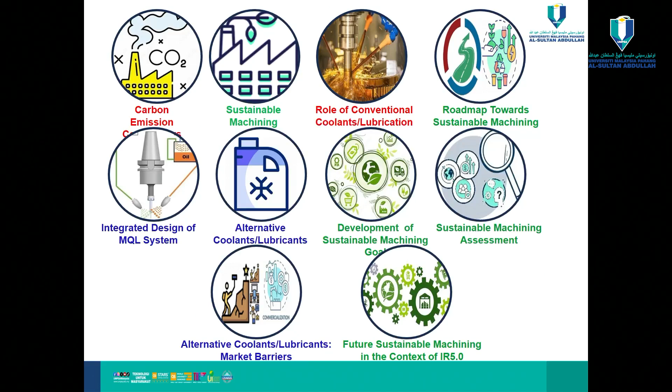So this is the 10 points I try to discuss today. And next, all right, we can see here

carbon emission distributed from different industries. Energy industry contributes 1/4 of the carbon emission, and manufacturing industry is also part of the energy industry, but we can separate it because today I talk about the manufacturing industry, which contributes 1/5 of the carbon emission. Transport industry 14%, agriculture and forest 24%, building 6%, and other industries 10%.

So, what is the problem with carbon emission? It increases the greenhouse effect. Here you can see the greenhouse effect mainly contributes to carbon emission, and this carbon emission comes from the manufacturing industry, 1/5%.

So how do we control this carbon emission in manufacturing industry? There are 3 problems here. Number 1, when the greenhouse effect occurs, the earth's temperature rises. If the earth's temperature increases, there are different causes, for example, rainfall patterns are globally changed - sometimes without season they have heavy rain, and sometimes flash flooding.

Another effect of earth temperature rise: sometimes in the forest they have wildfires. And the ocean absorbs excessive heat and carbon dioxide, leading to sea temperature rise, which threatens the marine system. That's why sometimes you see fish dying in the sea due to acidity - they develop acidity in the sea water.

And also we have weather events. Sometimes we can see a higher possibility of heat waves, sometimes hurricanes or storms, due to global warming and climate change.

So how can we address this problem? First of all, reduce carbon emission, number 1. Number 2, transition to renewable energy sources. Third, we can see sustainable practice in all activities. That's why today I'm talking about sustainable machining, because this is our main target.

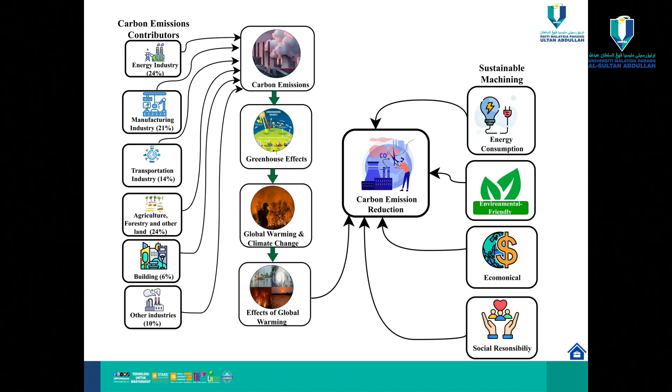Sustainable machining, when talking about sustainable machining, we have 4 components, the pillars of sustainable machining. In terms of technological aspect, product should be high quality - this is number 1. Number 2 is economically viable, that means economically profitable, the cost should be cost effective, less price to produce the product.

Third is the main component today, how to make energy efficient or the environmental impact. Because when we're talking about Industry 5.0, one of the pillars is sustainability, so we have to consider minimum energy consumption using eco-friendly machining systems. The fourth one, not considered in Industry 4.0, is the society responsibility, or the human less risk or less hazard. So these are the 4 components.

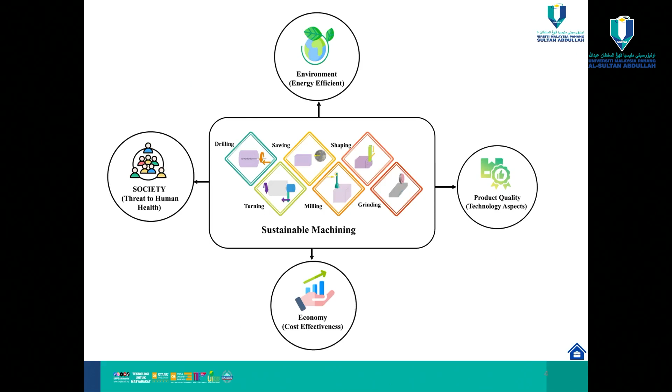Now next slide, we can go to product quality. What component do we need to consider during sustainable machining? These are the things we need to consider when talking about product quality. Product surface should be very smooth, that means good surface finish. So how can we define the surface finish?

Number 1, tool life should be higher. When using the machining system, they have the tools, so this tool life should be extended tool life. And for productivity, we can consider high material removal rate. So these 3 components we can consider here.

And for the product, we can see the cutting temperature, cutting force, and cutting power. This should be minimum, so reduce energy consumption. So when considering sustainable machining, these are the product quality related components we need to manipulate or control.

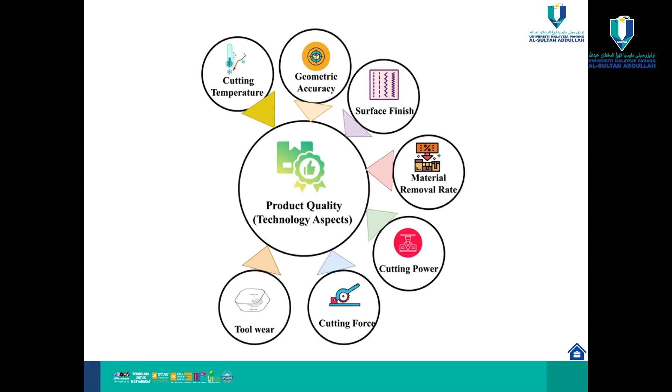Next slide. Cost effectiveness - when talking about cost, we have to find alternative tools, because tools are one of the components, so tool cost we need to minimize, and lubricant and coolant cost. This is the main component of product cost - coolant cost, cutting tools, and electricity is the energy, so how we can make an energy efficient system for our industry. This is and material cost.

And the other cost we can call disposal management - disposal, either storage or management or maintenance. So these things we need to consider.

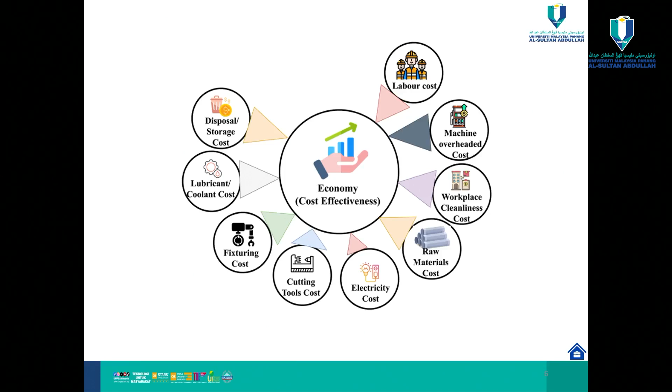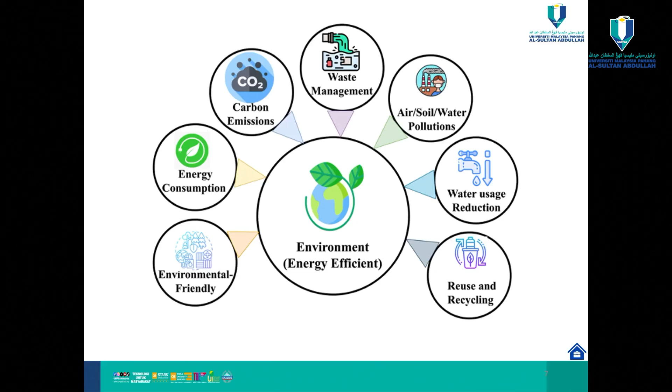This is the environment. The environment has pollution either air, water, or soil. So how to minimize this contamination? Because we're using cutting fluid, which has a lot of harmful elements, so how to reduce this contamination in the environment, and also energy consumption and eco-friendliness.

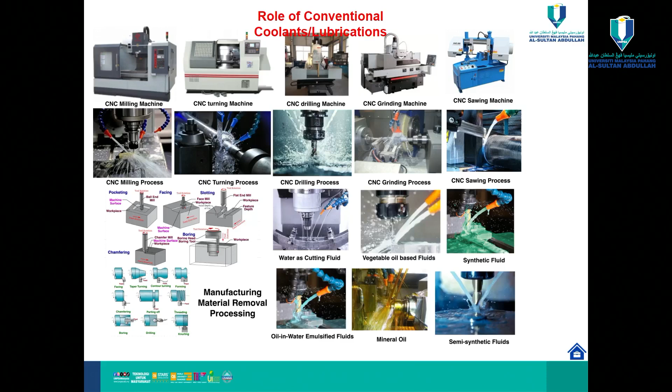What is the positive aspect? When you consider the cutting fluid, we need to consider 4 elements. Number 1, this should be more lubricant. So when you consider cutting fluid, it is more lubricant - what is the lubrication? This contributes to less friction, less wear.

So these are two things: heat reduction, and also coolant - when using cutting fluid, temperature should be reduced, so this is the second item. Third item is chip transport, taking chips from the cutting zone. And the fourth item we can consider is rust prevention or corrosion resistance. So these are the 4 components you consider.

Currently we can use water as a coolant. Water is a good conductor, but it has less lubrication properties. So this is not ideal, and it causes corrosion. So this is not ideal for current sustainable machining.

Second one, normally we use mineral oil. Mineral oil lubricant is good, heat transport is also good. However, the problem is this is also corrosive. Sometimes they corrode because of some additives in the mineral oil. So that is not suitable for sustainable machining.

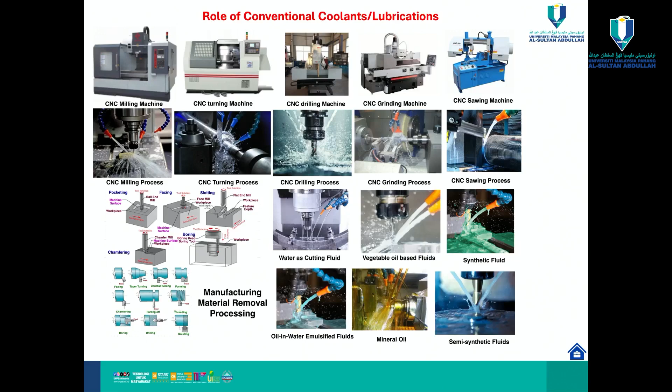So when you select the cutting fluid, first we want to see what type of method it is - either milling or turning. Type of machining is number one, because different processes need different cutting fluid selections. Second is what type of material you want to cut - soft material or hard material. So it depends on a lot of factors.

So normally we use water, either mineral oil, synthetic or semi-synthetic, or water-soluble cutting fluid. So they have some problems in the environment and human health. So what is the environmental adverse effect?

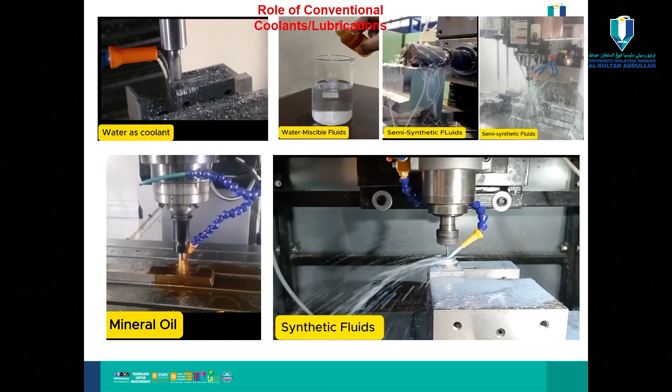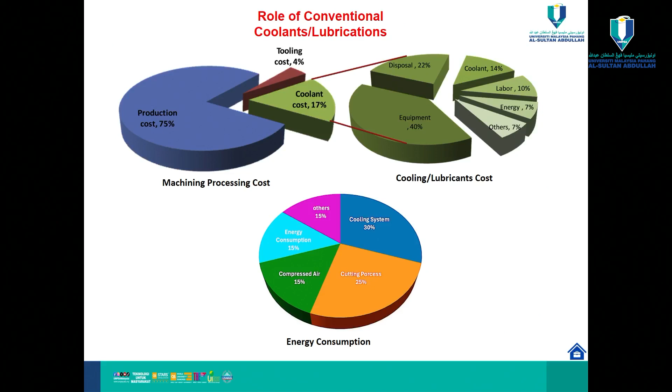So why do we want to change our mind from conventional machining to sustainable machining? Number one, you can see coolant cost is 17% of the total cost of the product. So this is very high. That's why we want to find alternative solutions to reduce coolant cost and other energy consumption.

You can see here, conventional coolant - I already mentioned they have 4 advantages: good lubricant, good chip removal capability, also corrosion resistance, and heat dissipation. So these 4 criteria are good for conventional machining.

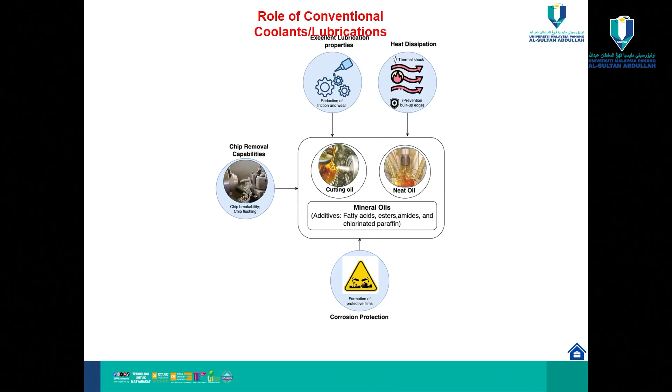What is the adverse condition? This contributes to Industry 5.0, because Industry 5.0 should be environmentally safe and also reduce human health risk. You can see here, environmental impact.

They have water pollution when using conventional fluid. A lot of fluid passes through the industry, then goes to the river, and the river gets polluted. Sometimes the soil is also polluted. During machining, there's mist or vaporization - this also pollutes the environment or air. Also you can see the floor becomes very messy, a slippery condition. Sometimes accidents happen. That's why you need to replace conventional fluid with sustainable cutting fluid.

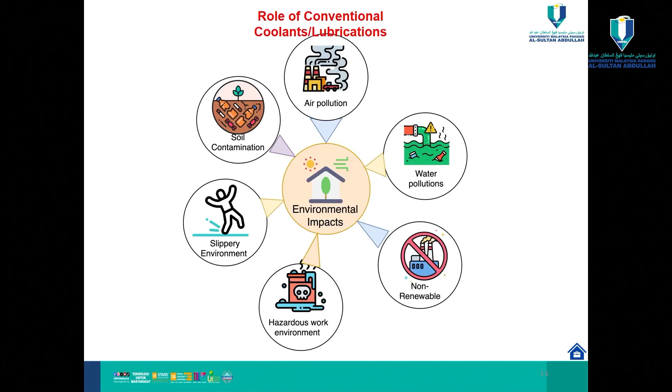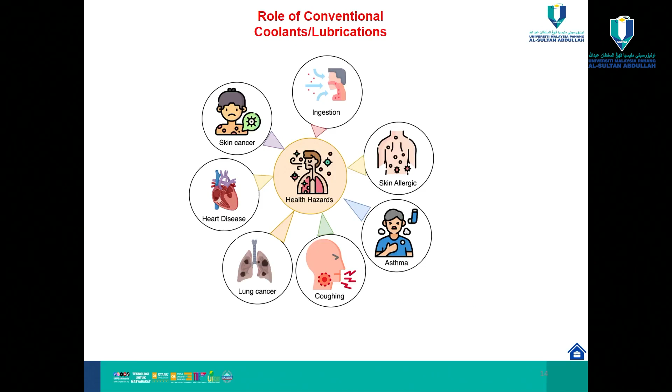So you can see the human factor - this is the main cause in Industry 5.0 of why conventional fluid converts to sustainable machining fluid. Because during machining there's mist or vapor, which we can take in through the mouth or nose, and a lot of problems occur. That's why with our carbon emission standards, we need to minimize this contamination or risk.

So converting conventional fluid to more sustainable fluid - that means, as I already mentioned, either synthetic or semi-synthetic or emulsified oil. So they have all 4 components, and we can also improve the microbial resistance.

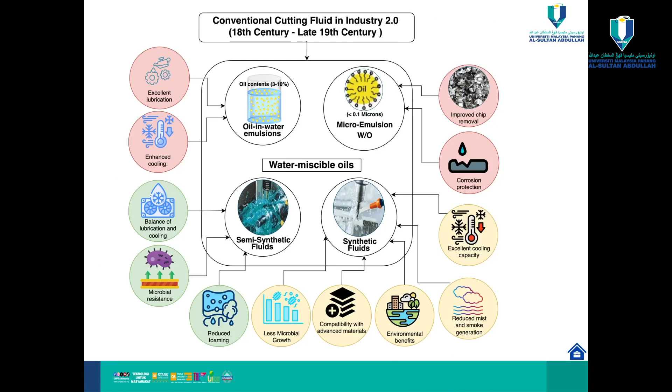So now comes the final choice for the conventional fluid to the sustainable fluid. This is a biodegradable oil or the vegetable oil using as a cutting fluid. This is less toxic and also has a low carbon footprint, so it's called eco-friendly. However, they have the problem of low thermal conductivity. This is one of the main components for the cutting fluid.

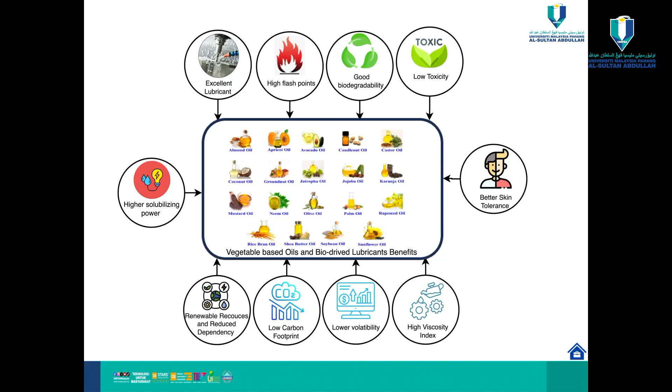We can see here the history of why it becomes sustainable machining. First, from the very beginning, Industry 1.0, they start from water and mineral oil as a cutting fluid. Then comes synthetic, semi-synthetics, and finally goes to the biodegradable, or we can say the vegetable oil, as a cutting fluid. And then, to reduce this adverse situation, we can come out with a new cutting technology, which we call dry machining.

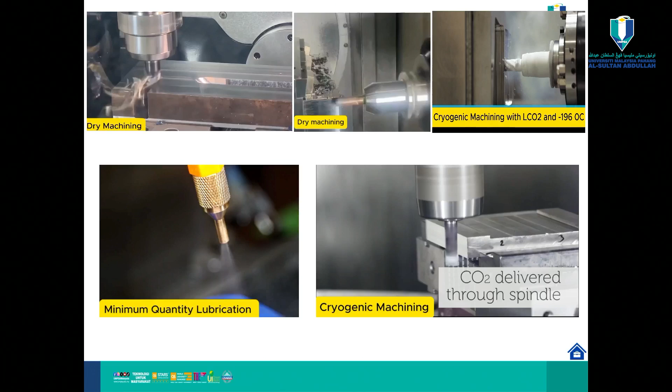Okay, we can see here dry machining. In dry machining, they are not using the cutting fluid, so 17% of the cost we can cut here. So number one is dry cutting, but they have a lot of advantages. Number one, no cutting fluid, no recycling system for the disposal, so you can cut the disposal system. Number three, this is environmental friendly, so the working place is neat and clean.

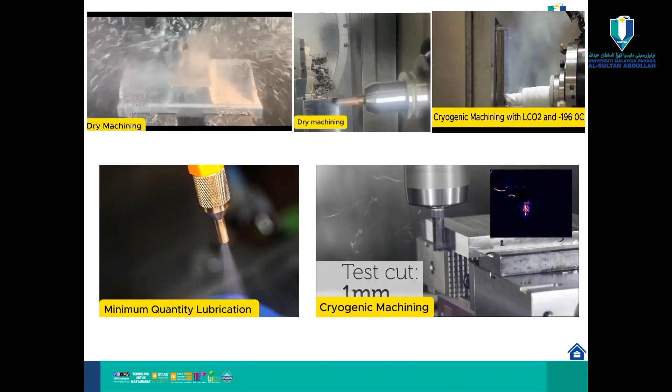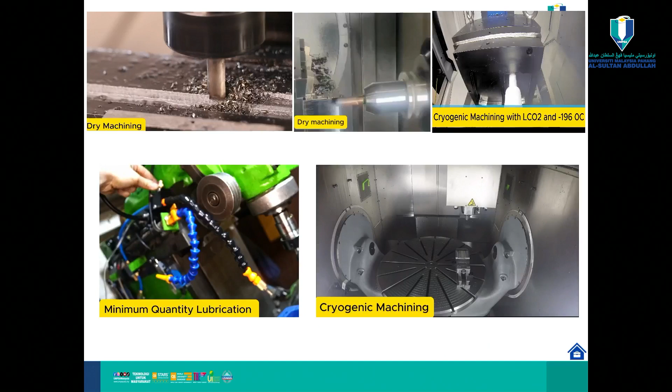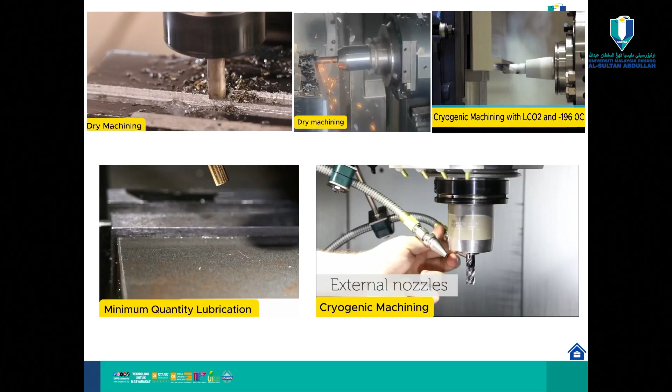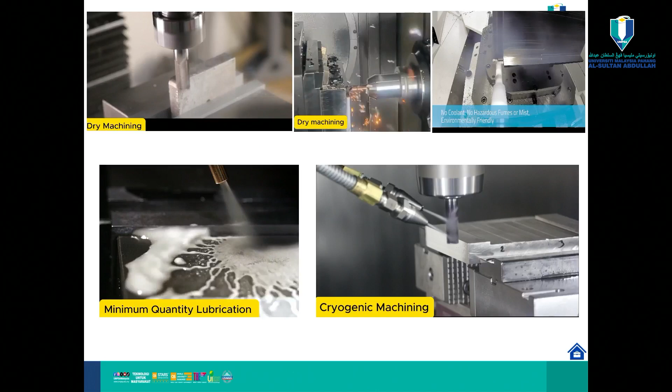However, they have problems. Number one problem is the chip disposal surrounding the working place. Number two, when you dry machine, they create high heat and also high friction, and sometimes you can see firing during the process. So dry machining has fire issues, and also reduces productivity and product quality. So although this is sustainable process, it is not good for the whole material, so this is not the final solution.

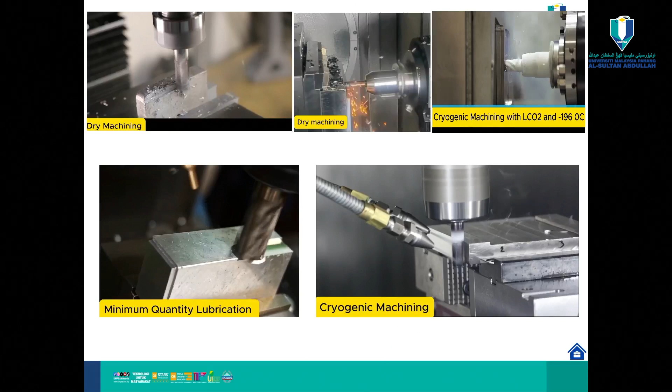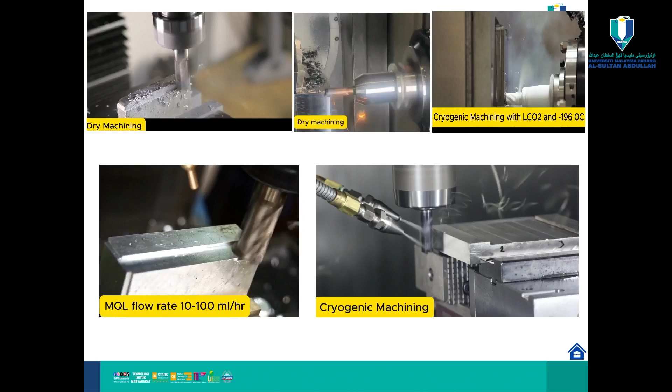Then we can come out with cryogenic machining. But cryogenic machining, one of the main drawbacks is the initial cost is very high. Product quality is good, and temperature is also controlled. So this is another option, but the main problem is very high initial cost.

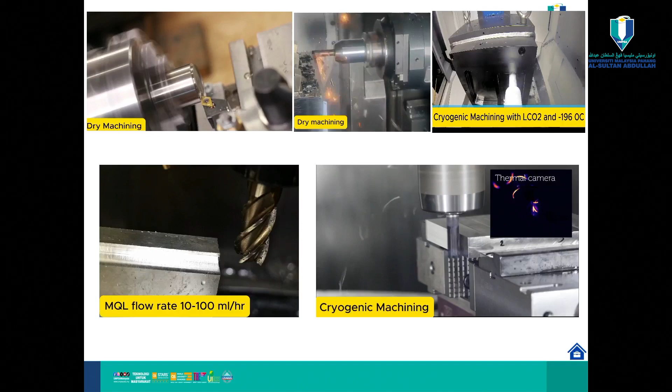So then we can come out with the MQL system, minimum quantity lubrication. This is our final solution, becomes a sustainable machining.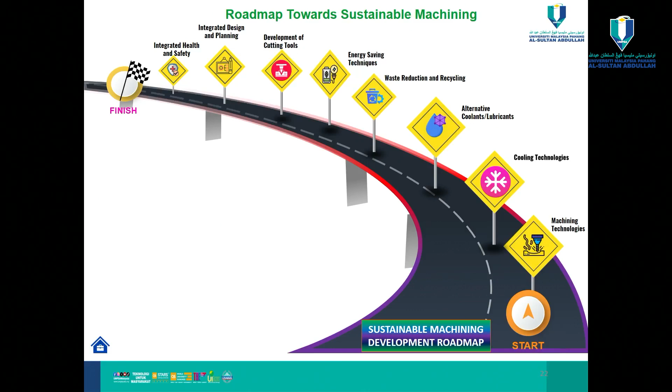So what is the roadmap to become sustainable machining? First, we need to consider the machining technology, then the cooling system, what type of cooling system we can consider, alternative coolant, and waste management system. And finally, you can see the integrated system. So today I try to concentrate more on the coolant technology and the alternative coolant becoming sustainable machining.

All right, so this is the sustainable machining coolant system. We already mentioned they have a lot of choice. Which choice you can pick is based on your available facilities. For example, if you're using cryogenic, the initial cost is very high. But when you consider minimum quantity lubrication, this is a small investment, initial cost is very less, and this is good, quality is also good. You can see here MQL, nanofluid MQL, hybrid nanofluid MQL, hybrid nanocoolant MQL, and other types. So we only consider here 3 types.

MQL with the nano coolant.

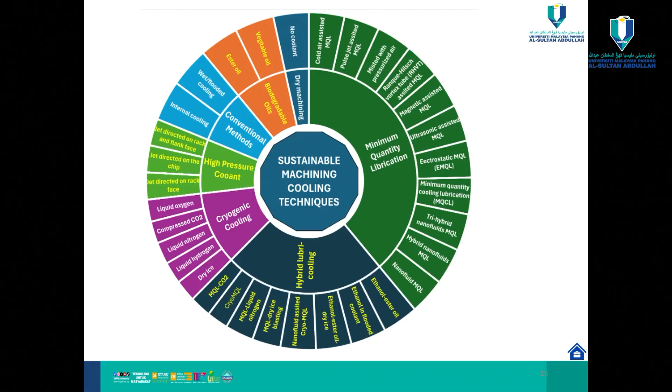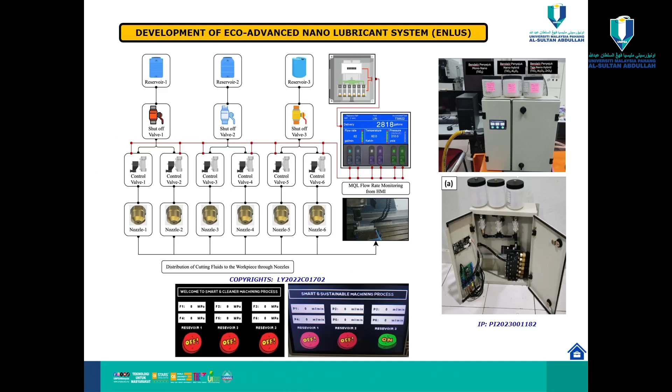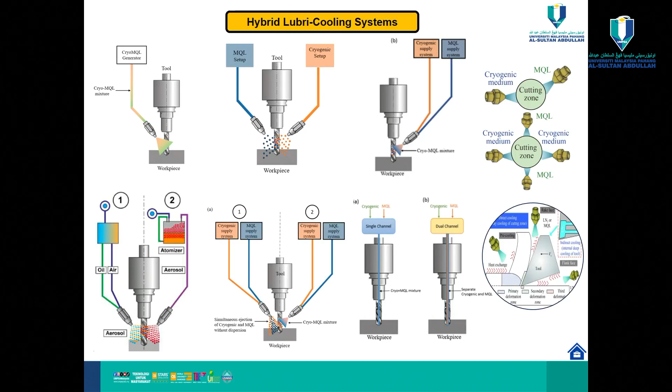This is for future research: we can combine cooling and lubrication systems. If permitted, there are alternative solutions to consider, either internal cooling or external cooling, combining two different methods, such as cryogenic MQL or MQL with other coolants like liquid carbon dioxide, liquid hydrogen, or liquid nitrogen. So you can use different techniques here.

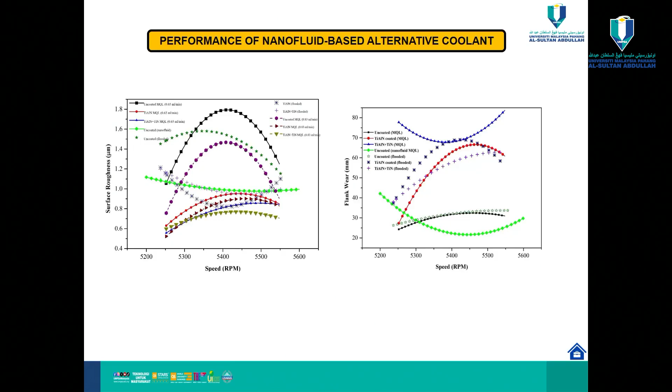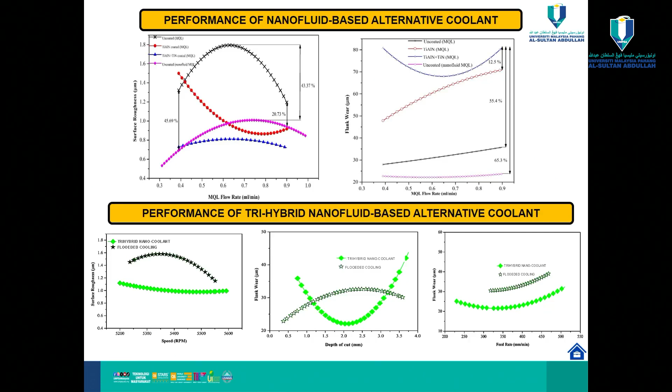This is the tri-hybrid nanofluid. All three show reduced surface roughness, meaning good surface finish and reduced tool wear. Both flank wear and tool wear are improved. This is also an encouraging result here.

This is a very good outcome for industry - this is the tool wear chart. We can see three zones, mainly two zones: one is less wear, the safe zone. Based on industry requirements, people can select accordingly. Same color means same tool wear, so we can manipulate speed and feed rate for our targeted productivity, and increase productivity based on this outcome.

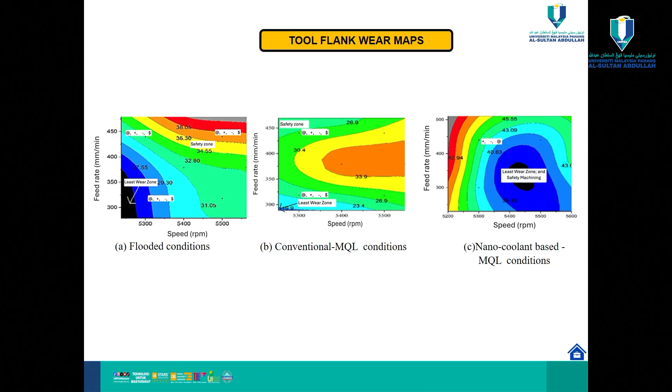We can compare three different methods: MQL, flooded, and the conventional method which is flooded. The next one is MQL with conventional fluid, meaning we use biodegradable oil. The last one is eco-friendly nano coolant, our alternative coolant here. You can see the surface finish is very nice compared to the other two methods.

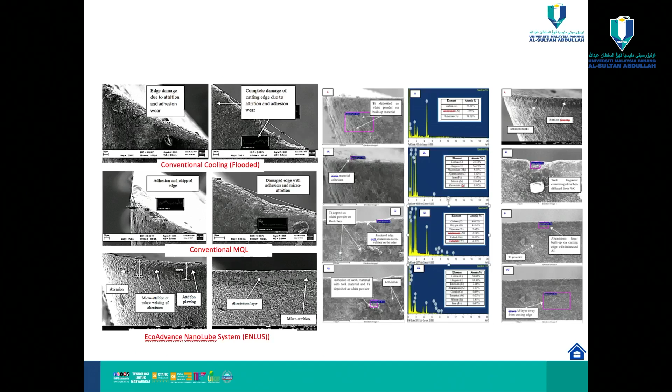So how can we come up with an alternative coolant using nano fluid or nanoparticles? First, we select the nanoparticle type, either mono, hybrid, or tri-hybrid, based on different combinations such as metal, metal oxide, ceramic carbide, or ceramic.

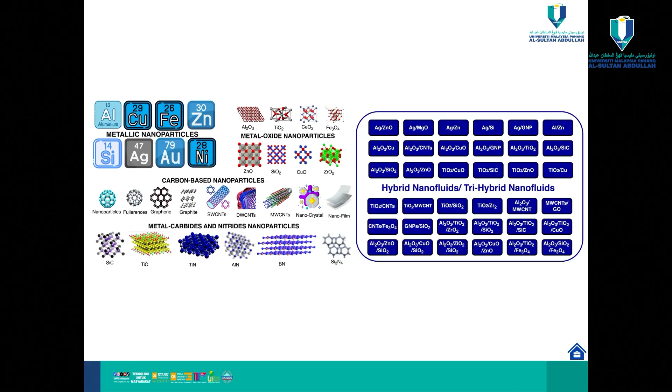This is a summary example - we can combine different materials here, either metal, metal oxide, metal carbide, or metal nitride. This combination is based on your requirement.

Then we use the base fluid. The base fluid we use here is water and ethylene glycol, but there are other options available - we can use mineral oil as well.

This is a summary of examples of different base fluids: synthetic ester, semi-synthetic oil, or even mineral oil, biodegradable oil can serve as a base fluid. But we are using water and ethylene glycol in our example.

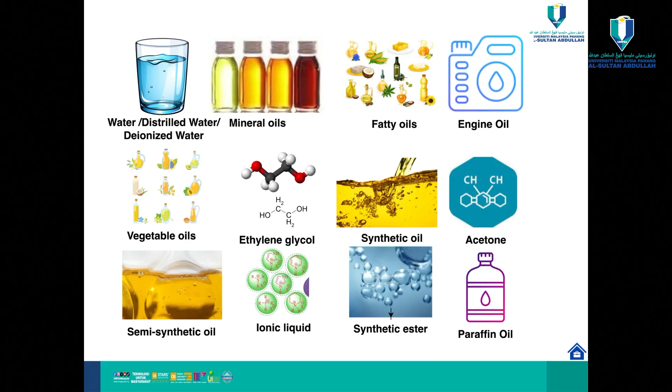After mixing all these things, we check whether the fluid is stable. There are different methods to enhance stability, either mechanical or chemical. First, we can use surfactants - different types are available, but we use CTAB, SDS, SDBS, and PVP. There are other combinations too, either negative charge, positive charge, or both charges, depending on your requirement.

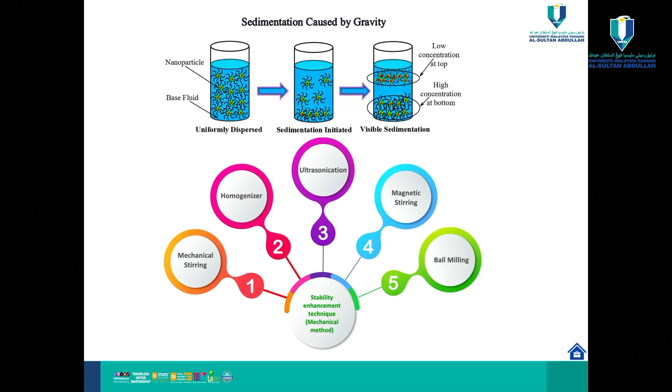This is some example of a different method we use to improve the stability of the nanofluid here.

This is how to check your stability - a summary of methods. Which method is available depends on what you have access to: potential, UV-Vis, viscosity, and other types. Normally people use one or two methods to check stability.

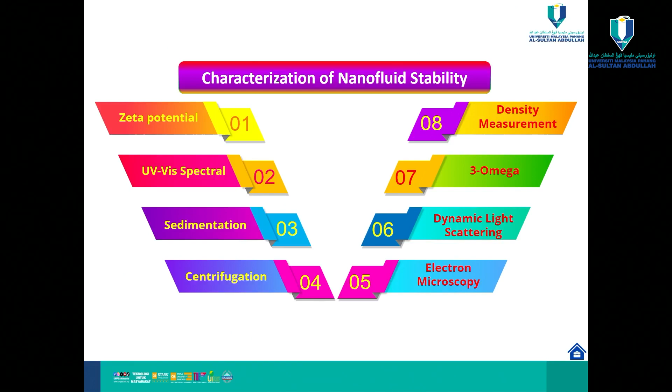This is the chemical method to improve stability. You can add surfactant, which is the method we use, or you can control the pH, or do surface modification, and so on. Our technique uses surfactant addition.

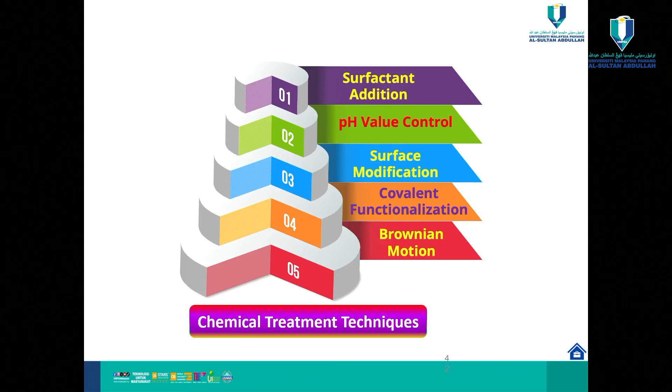This parameter actually depends on the nanofluid or the alternative coolant. There are a lot of parameters here. When using ultrasonication, it depends on the power, speed, frequency, and so on. So there's a lot of parameters, and it also depends on the base fluid property and the preparation method.

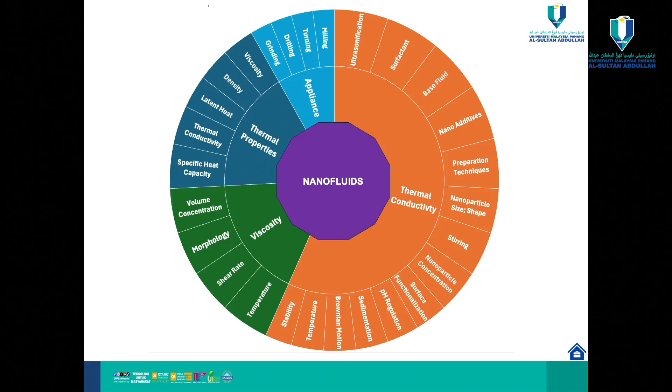Next slide: how to check your thermophysical properties, either thermal conductivity, viscosity, or specific heat capacity. It depends on different methods. This is a more complicated interaction between different parameters. For example, here I can use the NN method, and there are a lot of parameters we can manipulate.

Finally, we can come out with our expected result, because the nanofluid needs high thermal conductivity and less viscosity. So these are two multi-objective targets, and we need to use multi-objective optimization to come out with our final targeted nanofluid.

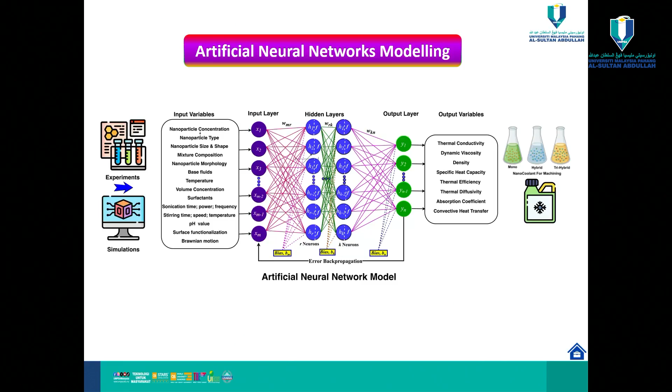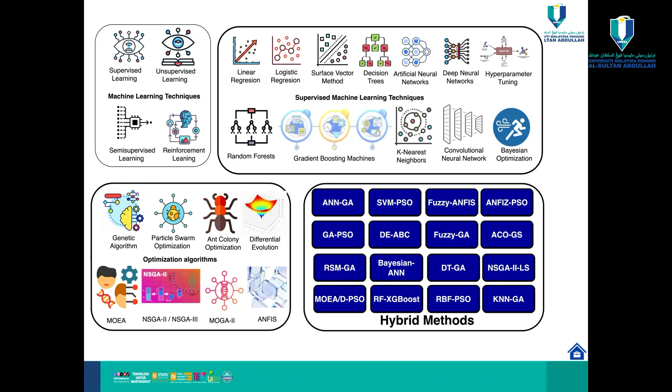Next, the nanocoolant. This is some of the methods you can use here, either a combination of a predicted model and an optimization model, such as ANN with genetic algorithm, and fuzzy or genetic algorithm. This depends on your capability.

So now, how do we develop our sustainability model? We use this model to come out with our final result. Some parameters we need to reduce, and some parameters we can maximize.

For example, machining cost should be reduced, and energy consumption should be less. Carbon emission also less, waste also less, and coolant or lubricant should have less consumption, and health risk also less, contamination less. And what should be high? Product quality should be high, material removal rate should be high.

Geometric accuracy should be very high, and tool life also high. So we use this model, our sustainability model, in our system for the final result.

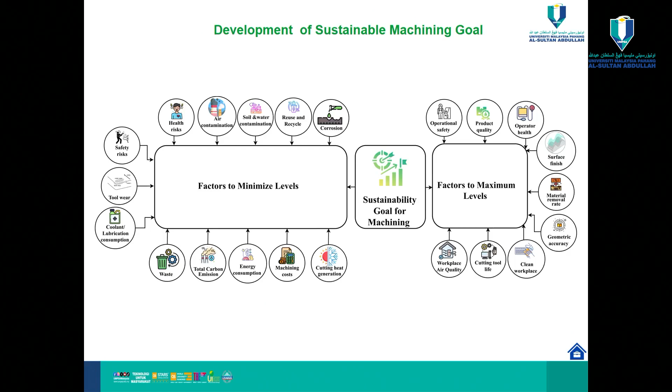Next slide: this is our experimental flow. We are using a soft material here called aluminum alloy, because when machining aluminum alloy, the build-up edge is very high, so we need to reduce this. The cutting inserts used are uncoated tungsten carbide or coated tungsten carbide, and also diamond coated carbide.

We use 4 different cooling methods: dry machining, MQL-based cutting fluid, hybrid, and nanofluid cutting fluid. For the machining process, we consider feed rate, cutting force, depth of cut, and MQL flow rate.

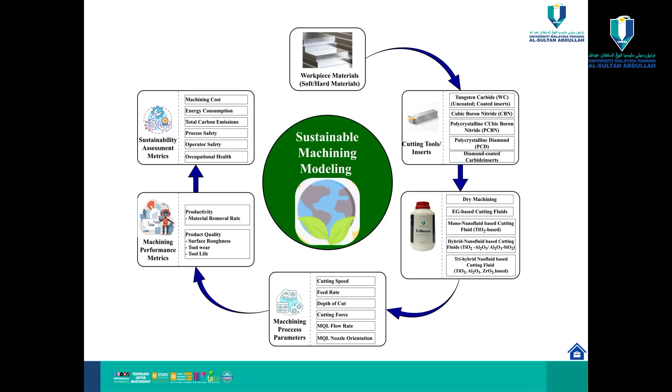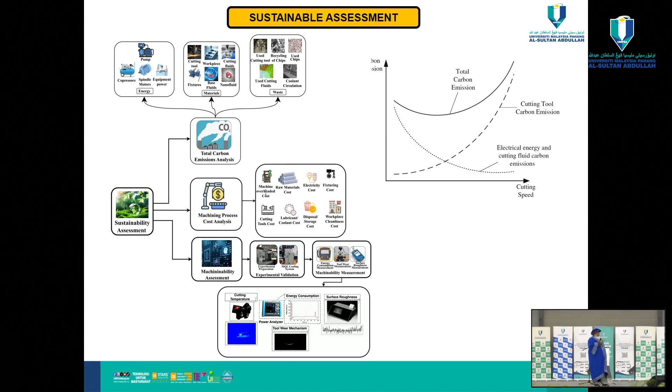Next slide: this is our final validation. How can we reduce carbon emission? We check the energy consumption for the recycling system, the machine, and also the material. Second, we check the cost element and cost analysis, and third is machinability analysis. So there are 3 different elements here.

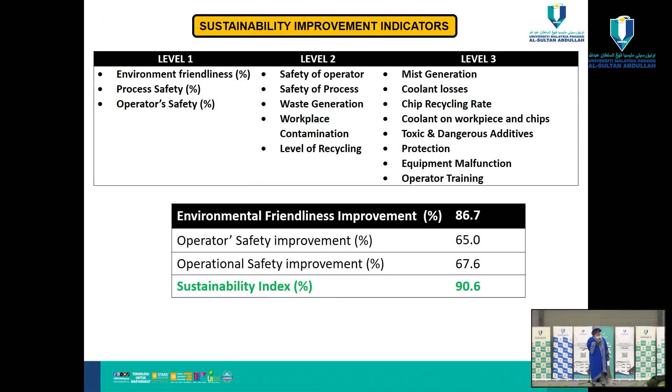After coming out with all these things, we develop the sustainability development model using the fuzzy logic technique, and we find the sustainability index increases by 90% compared to the conventional method.

Consider 2 hands. Now, with these 5 fingers, I only move 1 finger, and we can touch another one. Okay? Do it together. This is 1 hand. We can toss it here. Any sound? No sound. We can make it 2.